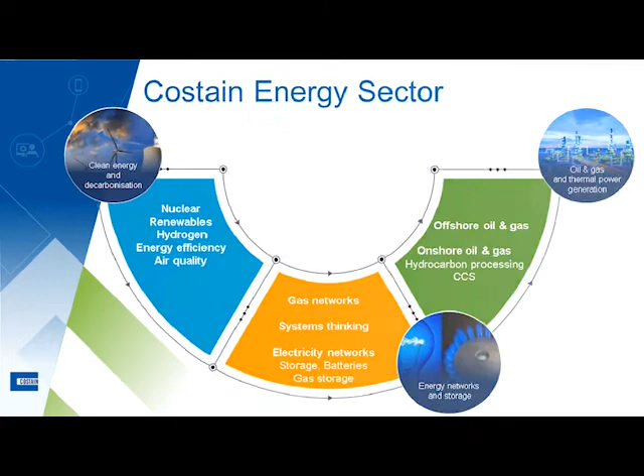Anyway, let's get to the main event. So, as Dave said, this talk is about the Medium Combustion Plant and the Medium Combustion Plant Directive.

So, first thing is to establish what is Medium Combustion Plant. It is anything between 1 and 50 megawatts. Now, that is the rated thermal input, as measured by the net calorific value of the fuel which is going in. So most of that energy in most systems will go up your exhaust pipe. So you may be looking at anything from 30 to 40% efficiency, and the rest of the energy is lost.

So be careful when looking at your systems to not be caught out by using your motive power or your energy at the point of use. It applies to all types of fuel, broadly speaking, and it applies to fixed and mobile plant, but not vehicular type plant, as we'll see later on. Okay.

So what is the need for the MCPD? As alluded to, there are lots of regulations out there at the moment, covering all sorts of aspects of emissions, pollution control. Principal one nowadays that a lot of you may well be aware of is the Industrial Emissions Directive, and that covers a number of areas, but it encompasses also the Large Combustion Plant Directive, which covers units with a net thermal input of 50 megawatts or above.

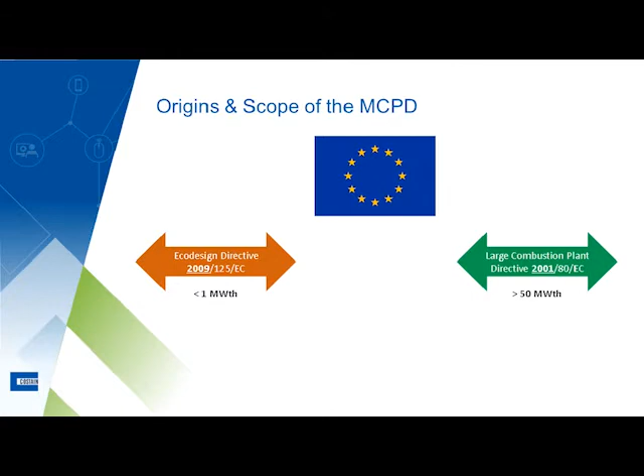And then in 2010, the Industrial Emissions Directive came in, which absorbed the Large Combustion Plant Directive, and 6 other directives were all brought into that, including the IPPC, the Integrated Pollution Prevention Control Directive, under one umbrella. And that has continued to run since about 2010.

But that left a gap in the landscape of combustion plant, which has subsequently been filled by the Medium Combustion Plant Directive. As you can see, going back to the numbers that were involved, it represents a large number of units, and therefore quite a large contribution to potential pollution emissions.

The timeline: so it came into force sort of 2015, 2016, and, as with all of these sort of directives, there were some transitional arrangements and time for operators to make changes, and the cut-off point for what would be considered new plant was the end of 2018. So beyond that, you have a new plant.

If you had your unit registered before then, you can take longer to comply with the regulations, and that will depend on the size of your unit. If you're a large unit, which is obviously going to produce more emissions, you're going to need to be fully compliant by 2025, and below 5 megawatts 2030. And there are some other exceptions in terms of sectors. So, for instance, in the gas transmission sector for the national grid, their units, even if they're above 5 megawatts, don't need to comply till 2030.

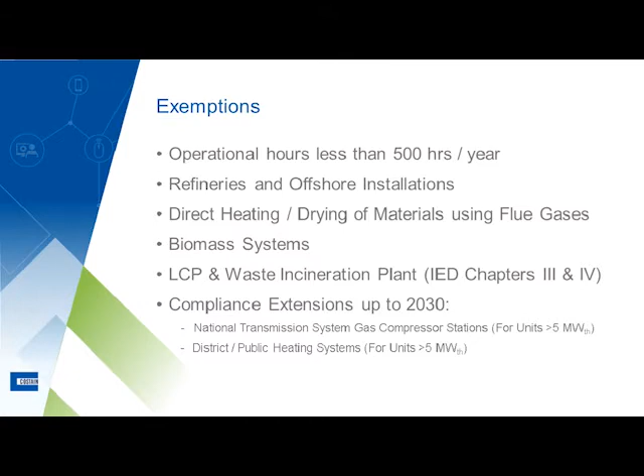So how does it work? Well, as I said, it covers units between 1 and 50 megawatts. And if you only have one of those units, it's quite nice and simple. If you have a 30 megawatt combustion plant, you will have the emission limits from the MCPD apply, and you'll be given a Medium Combustion Plant Directive permit. But if you have several of these units, maybe of smaller capacity,

the regulator and the regulations state you have to consider whether they are actually installed together and share a common vent stack or windshield, or whether you could have done that as part of your design process. If they do share a stack, or more importantly, perhaps if the regulator thinks you could have designed it to do so, then you need to aggregate those inputs or those thermal loads. So two 20 megawatt combustion processes would become 40, or two 30s would become 60.

Now, depending on the size of the units you're aggregating and how many of them, you may then get pushed into the large combustion plant territory, and you may be regulated under that set of emissions, etc. I'm going to give some examples in a minute, but in order for you to fall into the LCP, you would only aggregate units of 15 megawatts or above.

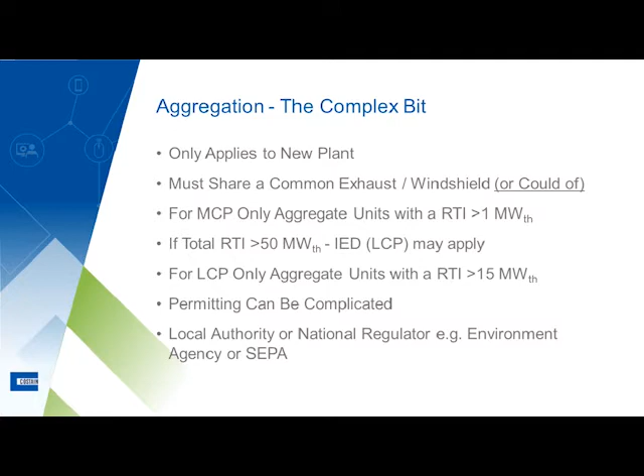Right, so I'm hoping the next slide starts to give you some idea of how this might work. Now, the aggregation rule does not apply to existing plants. So if you have two 20 megawatt systems, you would not aggregate those, and they would be permitted as MCP plant, MCP under the Medium Combustion Plant Directive. If you had an existing unit, i.e. before 2018, and a new unit post 2018, again both 20 megawatts, you would not aggregate those because of the existing unit rule.

If you have two new units of 20 megawatts, you do aggregate those, and you get effectively one 40 megawatt system. Now, because that is below 50 megawatts, which is the limit for IED, that stays as a single MCP under the MCP regime. If those two units were higher capacity, let's say 30 as it shows there, you would then have 60 megawatts of thermal capacity, and that would put you into the Large Combustion Plant Directive territory. So you would be regulated under a different set of regulations.

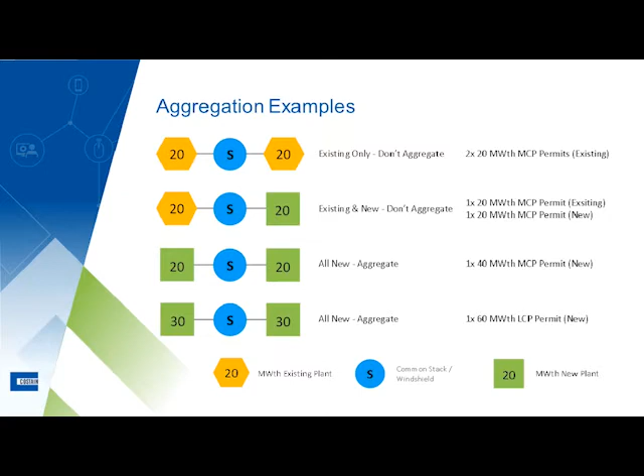And as I mentioned earlier, if it's below 15 megawatts, you don't need to count it as part of any estimation of thermal capacity for IED. You would only count that towards the MCP calculation. So what sort of control measures do we have with regard to meeting our emission limits? So the principal challenge these days with the medium combustion plant and the large combustion plant is controlling NOx.

And if you've got old units, you can retrofit some of them to have wet combustion or dry low NOx, dry low emission control systems. The wet combustion and or the other control system will try and manage the temperature of the combustion process. The mechanics of the combustion process being that the higher the temperature, the higher the generation rate of NOx, because most NOx in combustion plant is generated by high temperatures.

You can change the load profile. A lot more NOx is produced in combustion systems, particularly GTs and engines, when you drop the load profile. Anything below 60 or 50 on modern machines, you'll potentially start to see an increase in NOx. So, as you'll see later on, the emission limits which are applied tend to be applied, at least in gas turbines, at higher load, above 70%.

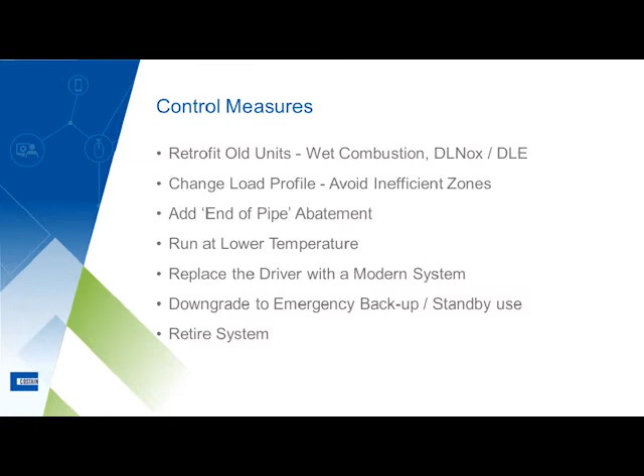Emissions monitoring depends on the system. Risk assessments will need to be taken, but in general, if you are over 20 megawatts rated thermal input, you would monitor your system annually. If you're below 20 megawatts, that would be done every 3 years. It is important that you're able to monitor your system representatively and reliably. So these systems typically would not require continuous monitoring or predictive continuous monitoring to be applied.

So what you're looking at for monitoring is coming along, as I said, once every 3 years or 1 year, and taking physical samples from the flue gases from a position which shows that the concentrations of pollutants that you obtain from those flue gases is representative. So you take cross sections across the flue gas vent and through recognised procedures and through load profiles where that's applicable.

If you are in an air quality management zone area, the frequency at which you monitor, and indeed the emissions you are allowed to put out, may be different as well. There may be additional requirements that are put on you.

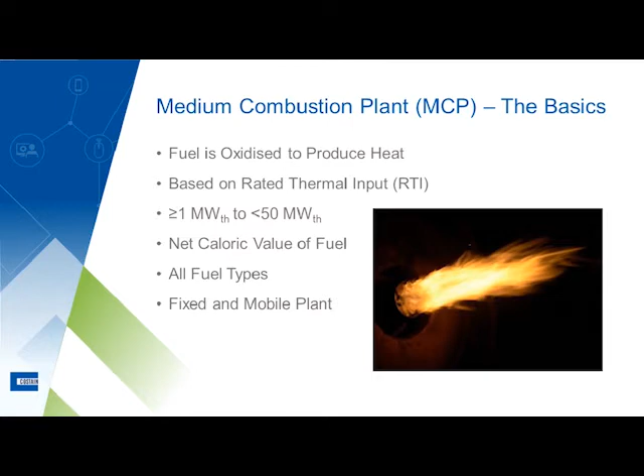Is it going to work? Or have I clicked too fast? Right, bear with me there. What's going on here? Go to, apologies, it's gone a bit.

The limits for SOx and dust do come down, but they're already reasonably well controlled from other historical technical advances or legislation which has existed in the past. So NOx has certainly been more problematic in recent times.

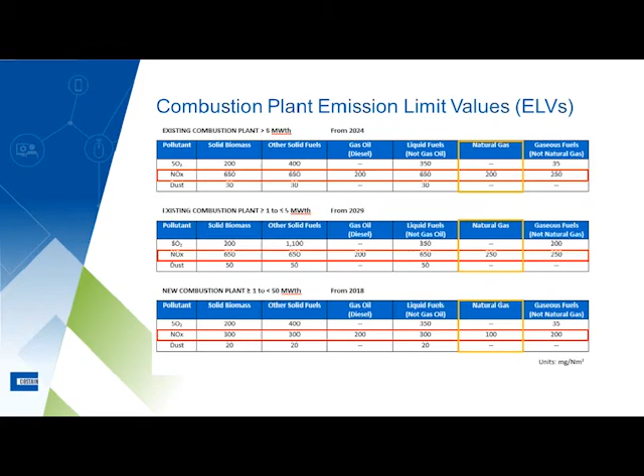And if you look at the next slide, which hopefully is for engines and gas turbines, you will see there that particularly for GTs, there's been a significant reduction in the emission limit values for NOx, and that represents improvements that have come through from units which fall within the Large Combustion Plant Directive, where the same technology in dry low emissions combustion plant is being used for GTs and engines at a lower scale. The same technology works there as it does for bigger plants.

So this is all perfectly available in the marketplace, and this should not be difficult for users to go out and buy and install and meet the necessary requirements.

The animation worked there.

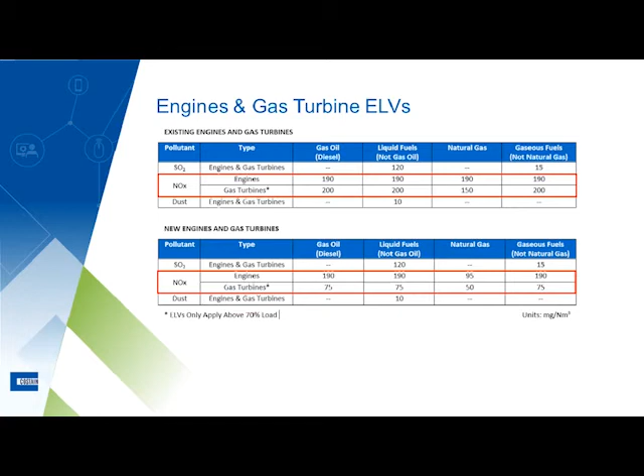Operator responsibilities. Basically, you have to register your system, maintain it, etc. You have to give routine data to the regulator, be that the Environment Agency or the local authority. Key point there is that you have to give a written declaration that you won't use your system for more than 500 hours, and that you will have your system tested on a routine basis once every year or once every 3 years, depending on its size. But it's all fairly straightforward stuff. Nothing really there that's going to cause anyone any problems.

Quick comparison: I've talked about the LCP and the IED a lot as we've gone through, so it's worth having a quick comparison. So in terms of NOx again, which I'm focusing on, this is for gas turbines, I should say. The limits are exactly the same. As I mentioned, there's currently no carbon monoxide limit for a gas turbine, but there is in the IED. You're only required to monitor it at the moment. The annualized ELV applies in the IED, but not for MCP. An annualized number being that

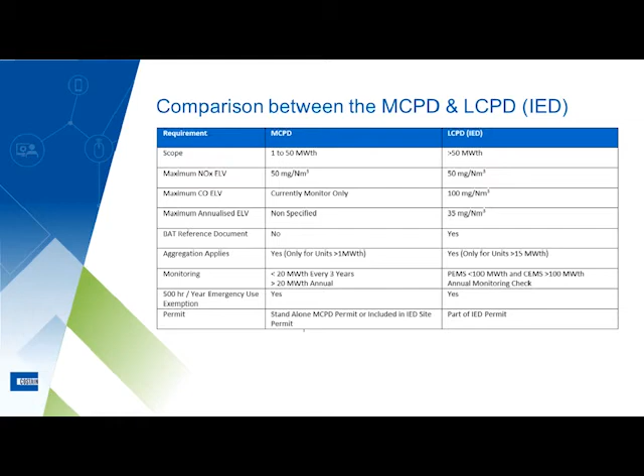So there's some differences on monitoring and permitting, but the key areas are around the emissions limits. Now, regulation, as I've alluded to, isn't straightforward. It can be very complicated. So you have the MCPD, 1 to 50 megawatts. You have the IED, which is 50 megawatts and above, but you have this grey area in the middle because of the aggregation rule, where your aggregated MCP units could fall into IED, Large Combustion Plant territory. And in terms of who regulates you, I hope this is going to work.

Right, yeah, the animation's packed up again.

Right, the animation's not working there, but if you're in the MCPD, you could be regulated by your local authority, or it could be the Environment Agency. It will depend on the activities which are going on on your site. Certainly, if you're in an office building or a factory, you're much more likely to be regulated by the local authority. But if you're doing more industrial type processes, or you do fall into the IED, it will most certainly be the Environment Agency. But I wouldn't say there was necessarily a hard and fast rule there. So you do need to have that consultation process. It's working now. So you hopefully see the overlap there in regulation as well.